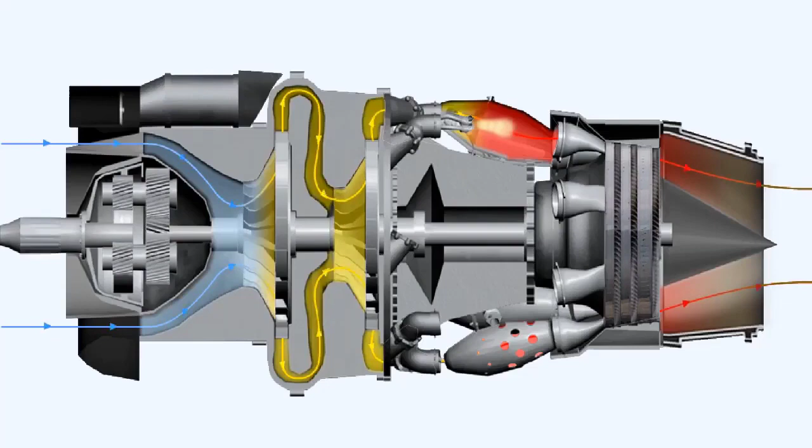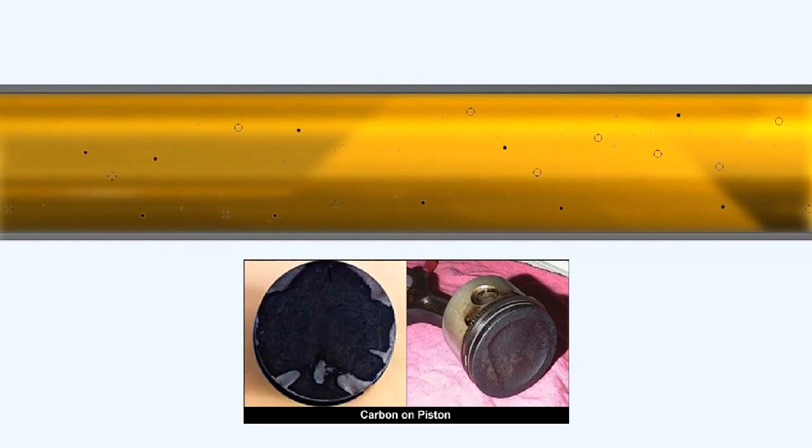Besides the primary reason of reducing friction, there are secondary reasons for having a lubricant within the engine. Even if the engine was kept scrupulously clean, there will always be small amounts of dirt or impurities that find their way inside it. That dirt must be removed from the oil before it can cause damage to bearings or block small oil passageways within the engine. The oil keeps the interior of the engine clean by carrying any contaminants in suspension in the lubricant to the oil filter, where they're removed.

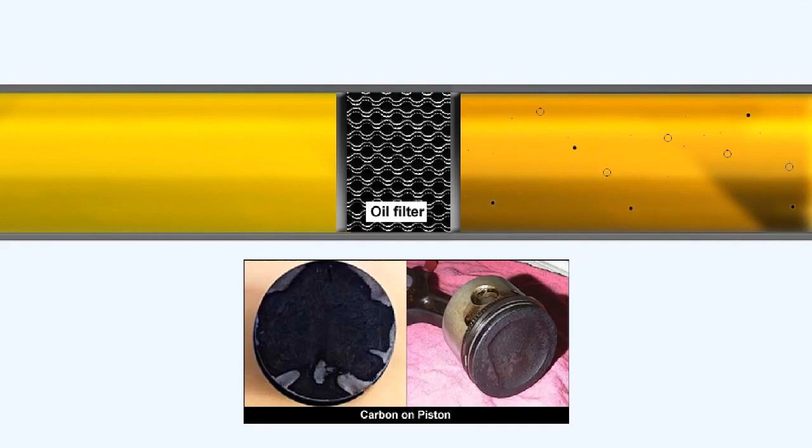The majority of the bearings within the engine are manufactured from steel, a metal which would soon oxidize itself if it were not prevented from doing so by a liberal coating of oil. Thus the lubricant also minimizes corrosion inside the engine. The bearing surfaces in the engine, particularly those towards the turbines, must be cooled if they are to be able to withstand the constant heat stresses imposed upon them. The lubricant is used to take the heat away from the bearing surfaces and transfer it to the oil cooler, where it's dissipated into the atmosphere.

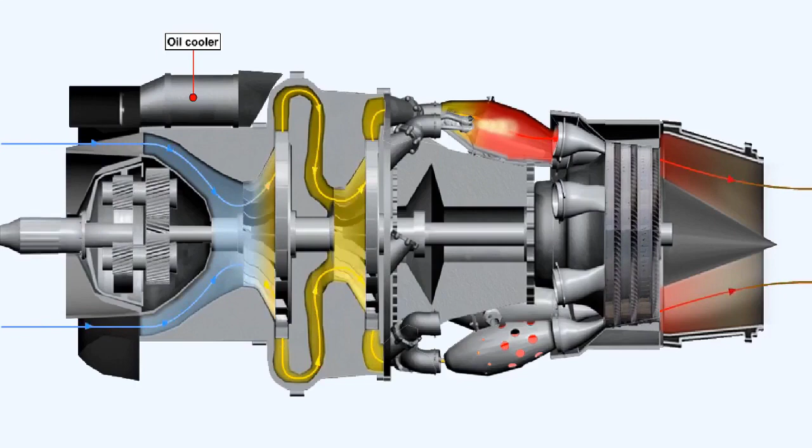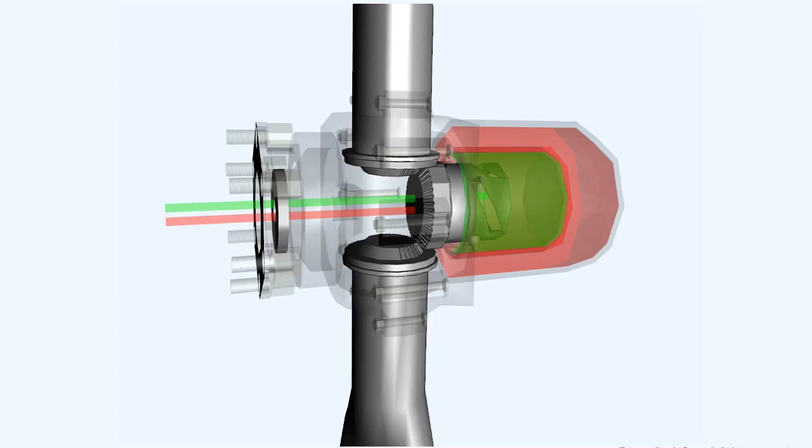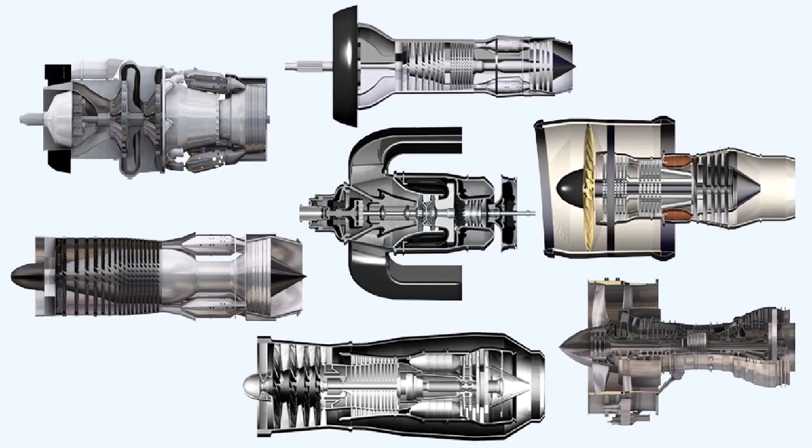A further task of the lubricating oil is that of being a hydraulic fluid. For instance, in some turboprop engines, the control of the pitch of the propeller blades is achieved by using the engine lubricating oil to operate the pitch change mechanism. Most gas turbine engines use a self-contained recirculatory lubrication system in which the oil is distributed around the engine and returned to the oil tank by pumps. There are two basic recirculatory systems which we'll investigate here. They are the pressure relief valve system and the full flow system.

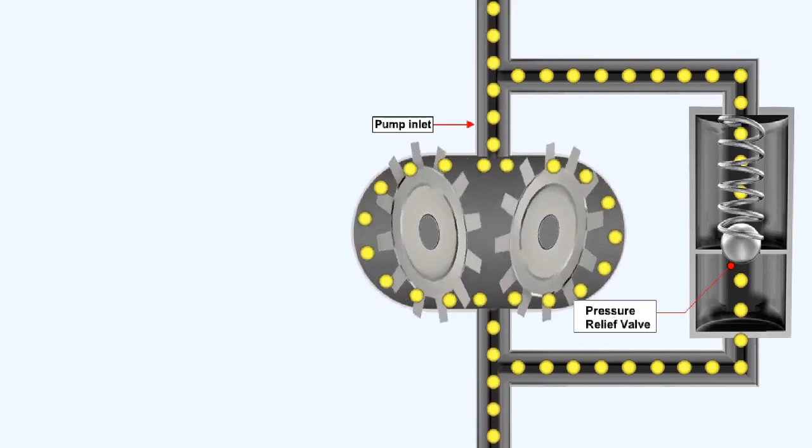The pressure relief valve, which gives its name to this type of lubricating system, is situated in parallel with the oil pressure pump. It limits the pump outlet pressure by diverting any excess volume back to the inlet of the pump, thus controlling the flow of oil to the bearing chambers. The engine oil pressure is restricted to a value which the engine designer considers correct for all conditions that the engine might encounter. The pressure relief valve will begin to relieve pressure at the value which is generated by the oil pressure pump at engine idling speed. As a consequence, the pressure relief valve theoretically maintains a constant pressure over the whole of the engine's speed and oil temperature ranges.

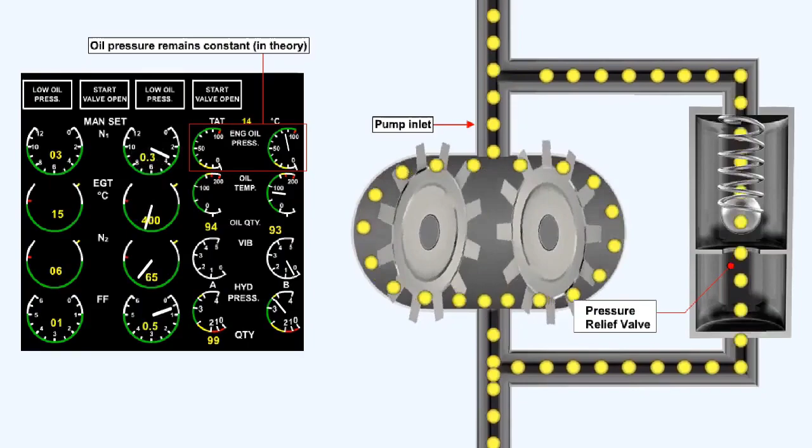This diagram shows the basic components required in the pressure relief valve lubrication system of a turboprop engine. The oil is drawn to the pressure pump through a suction filter. The suction filter protects the pressure pump from damage should any debris enter the tank. The oil pressure pump is contained within an oil pump pack. The oil pump pack contains one pressure pump and several scavenge pumps. Having several scavenge pumps ensures that the lubrication system remains a dry sump system. From the pressure pump, the oil is passed through the pressure filter, which removes any small particles which may block the feed jets.

The oil then flows to the pressure relief valve, which maintains the oil pressure to the feed jets in the bearing chambers constant. The oil is passed to the feed jets through internal drillings and external oil pipes. In this particular engine, the hollow interior of the compressor turbine shaft is used to transfer oil from the front of the engine, where it's used in the pitch change mechanism, all the way through to the rear of the engine, where it's used to lubricate and cool the turbine bearings.

The torque meter pump shown in this diagram is used to boost engine oil pressure to a figure which is considerably higher than normal system pressure. In some turboprop engines, the torque meter pump output can be as high as 600 pounds per square inch. Torque meter pressure is utilized to balance the axial thrust of the helically cut gears within the propeller reduction gear. The axial thrust is proportional to engine power output.

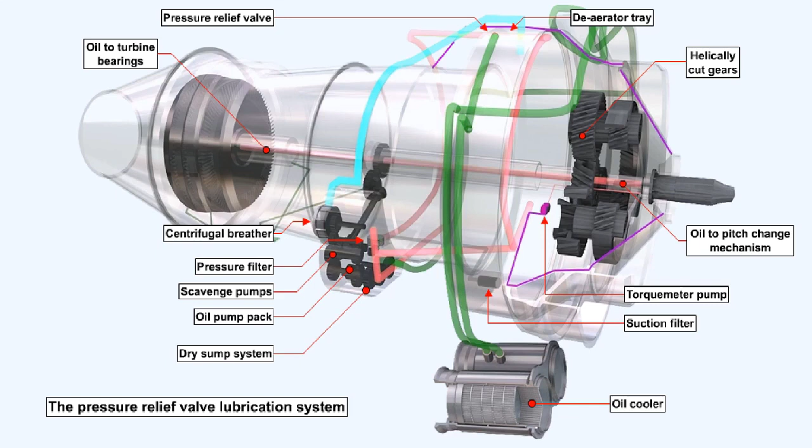The full-flow lubrication system achieves the required oil flow to the engine throughout its entire speed range by allowing the oil pressure pump to supply the oil feed jets directly, without the use of a pressure relief valve. Using this type of system allows the use of smaller pressure and scavenge pumps, since the volume of oil passed by them is less than that which is passed by the pumps in the pressure relief valve system.

This discrepancy in the volume of oil used in each of the two systems exists because of the large amount of oil which is spilled back, either to the oil tank or the inlet of the pressure pump, in the pressure relief valve lubrication system at high engine speed, whereas no excess pressure is generated in the full flow system. The pressure pump picks up oil from the oil tank through a suction filter. The high-pressure oil generated by the high-pressure pump passes through a pressure filter to the distribution galleries.

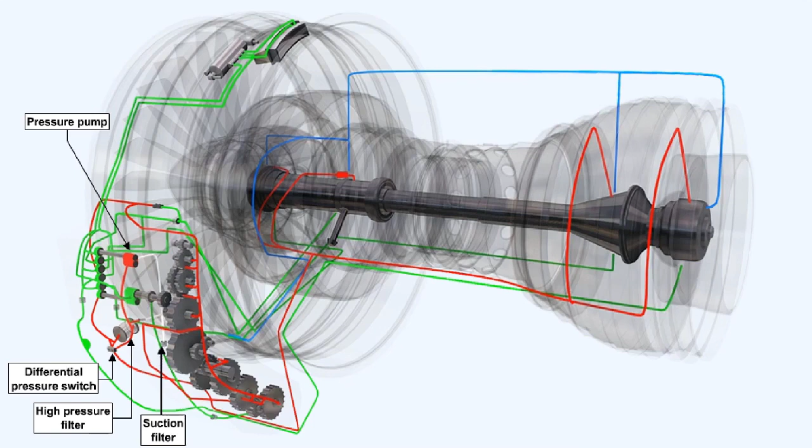Fitted across the pressure filter is an oil differential pressure switch. The oil differential pressure switch will give a warning of filter blockage. This warning is usually indicated at the ground crew servicing panel, and is sometimes duplicated by a warning light on the flight deck.

The upper portion of the oil gallery transfers the oil to an oil pressure transmitter and low oil pressure warning switch. These items are used primarily to give warning in the cockpit of malfunctions in the oil system. Other parameters indicated in the cockpit are those of oil quantity and oil temperature, the latter being measured as the oil leaves the oil cooler. A tapping from the upper portion of the gallery transfers oil to lubricate all of the bearings in the accessory drive gearbox.

The lower portion of the gallery is used to transfer oil to the bearings which support all of the compressor spools. The bearings are lubricated by oil jets, which are positioned very close to the bearings. This minimizes the possibility of the oil being deflected from its target by local turbulence. Thread-type filters are fitted in the oil supply line just before the oil jets. Thread-type filters perform the function of a last-chance filter, removing any debris which may have managed to pass through the main pressure filter.

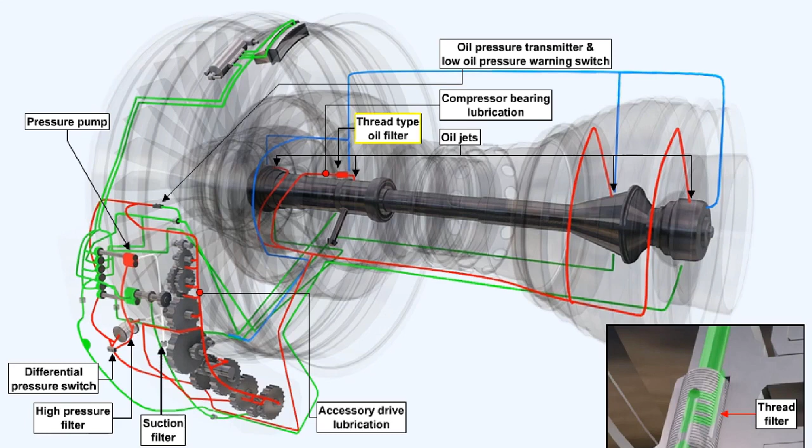In a similar manner to the pressure relief valve system, when the oil has completed its tasks, it's collected by scavenge pumps. Prior to the oil reaching the scavenge pump, it passes over a chip detector and through a suction filter. The scavenge pumps pass the oil to the oil cooling system. This engine utilizes two types of oil cooler, a fuel-cooled oil cooler and an air-cooled oil cooler. Normally the fuel-cooled oil cooler is sufficient to cool the oil on its own, but in the event that it proves inadequate, a valve opens automatically and brings the air-cooled oil cooler into operation as well.

We mentioned earlier that air pressure escaping from seals cannot be allowed to build up within the engine. In this engine, air pressure within the engine is vented through the hollow shaft of the drive between the intermediate gearbox and the external gearbox, leaving the external gearbox via the centrifugal breather.

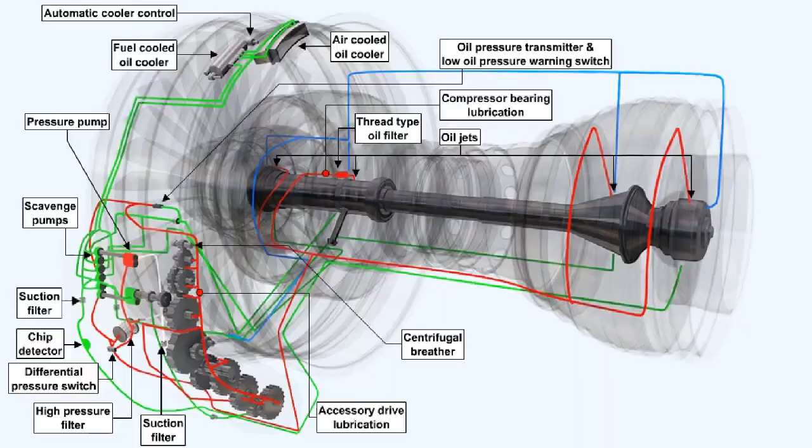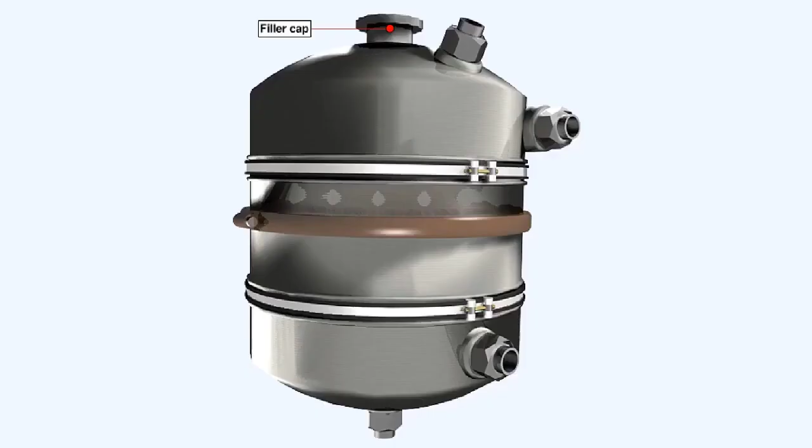The oil tank is normally a separate unit mounted on the side of the engine, although it can be part of the engine intake, or even an integral part of the accessory drive unit. Whatever form the oil tank takes, it must incorporate provision for filling, either by gravity or more normally from a pressure source. There must also be some method of determining the contents of the tank, either by a sight glass or by a dipstick. Sometimes both methods are used. A de-aerator tray removes air bubbles from the oil as it flows back into the tank.